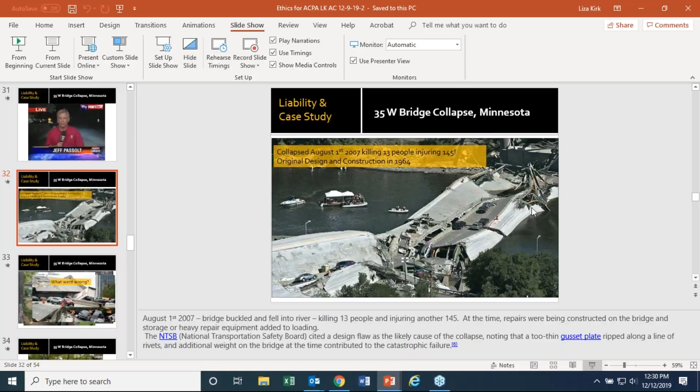Otherwise, I think you'll have to unmute again. It takes just a minute to unmute. Yep, we can hear you. All right, were y'all able to see the entire video? Yes, I did see it. Okay, because it blipped on my computer, so I wanted to make sure.

So we've learned a lot about this I-35W bridge collapse in Minnesota, which happened in early August. There was a lot of devastation because there were a lot of people's lives that were harmed. Look at the different vehicles existing on this bridge. Several people were missing for several days. So this was a huge outcry from the public about a disaster that obviously has some engineers related and involved.

So in further inspection, they went back to the original bridge design and determined that this collapse occurred on August 1st. They did determine that it killed 13 people and injured 145, which is significant. The original design and construction was performed in 1964. This happened in 2007, many years later, and the original design engineers may or may not still be around. But they wanted to know what caused this.

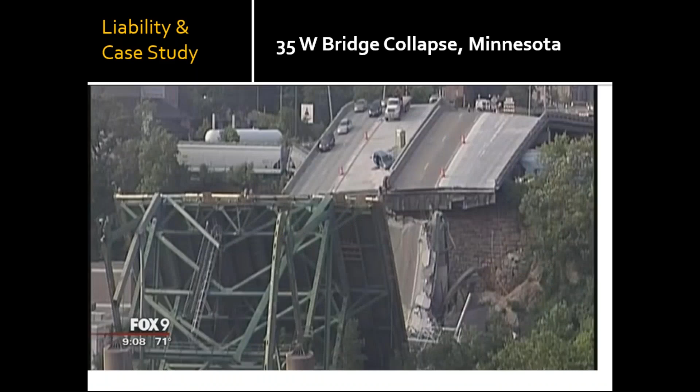Why did this happen? There were lots of different images that we saw. I remember hearing about it. It incredibly impacted the engineering community as a whole, and it brought into question our nation's infrastructure. It really supported a lot of what's going on with the ASCE report card, where we're talking about how our infrastructure is failing across the country, in all aspects. But this really called into question the bridges.

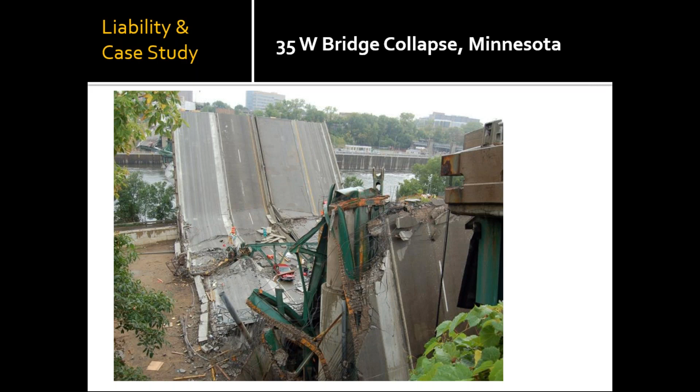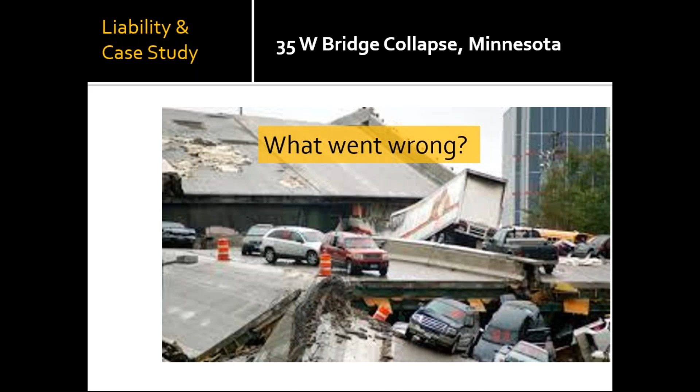Here are some different viewpoints of the bridge as it collapsed. Again, you see those vehicles stuck or crushed underneath the bridge as it collapsed. So everybody wanted to know what went wrong.

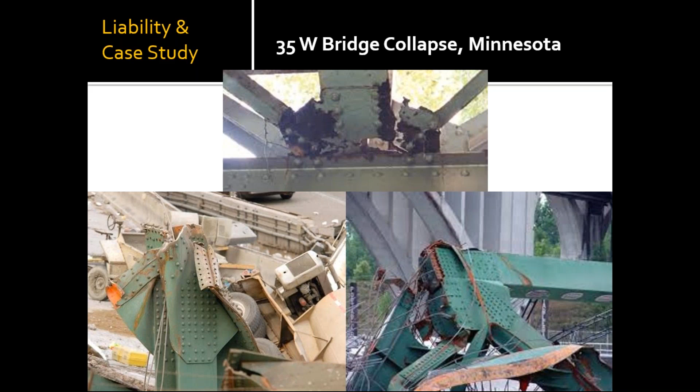They hired forensic investigators to come out and determine what the cause was, and they evaluated the different pieces integral to this particular bridge. They did determine that the gusset plates were too thin and undersized to be capable of supporting the loads. Here you see some of the deterioration and damage at the gusset plates as they failed.

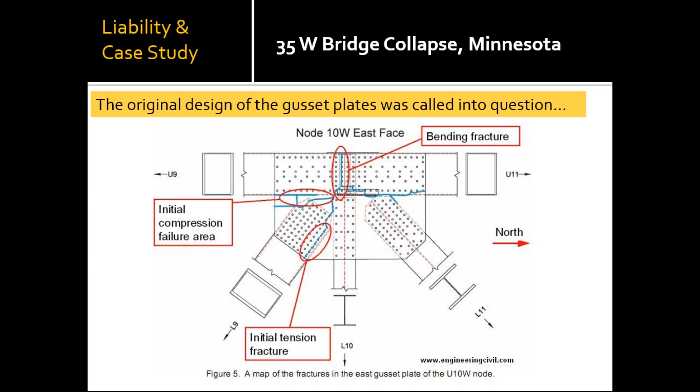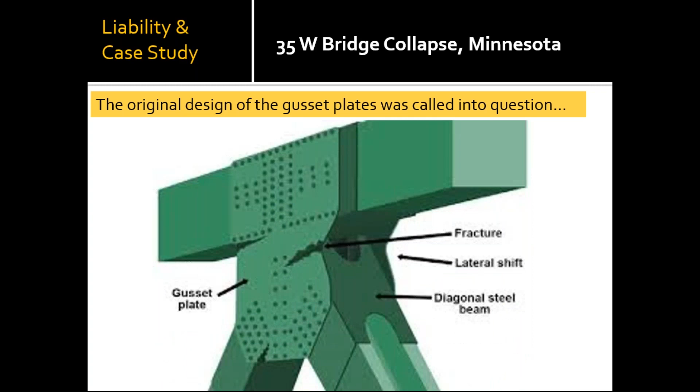So when they called the gusset plate into question, they were redoing a lot of the design calculations and figuring out where the fractures and flaws were in the design and how they could have possibly been prevented. Here we have a detailed drawing showing where some of the different fracture areas were that ultimately caused the failure of this particular bridge. Here's another 3D rendering showing that same fracture and how it just starts to shear and tear and pull everything apart.

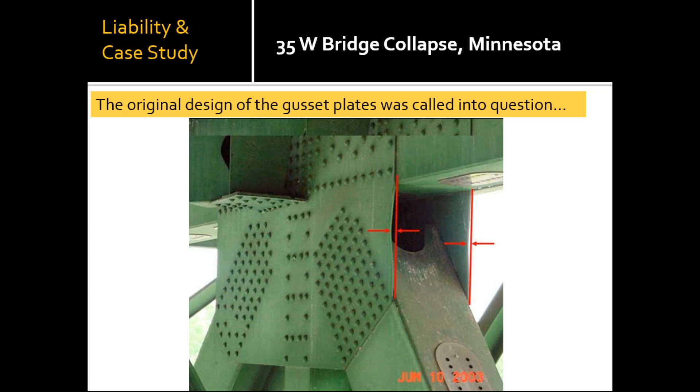And when they started to notice this, they hired URS as a company to evaluate and perform a structural analysis and failure analysis on the different parts. They were joining the DOT as they were going out to do these inspections.

So we went back to the original design, and they were the ones who put together the original gusset plates, back in 1964. Jacobs is the engineer now; they had acquired the company that was the engineer in 1964 that did the original designs. Then, as mentioned, in 2003 URS was hired to do a fatigue analysis on all of the structures. As they were partnered with the DOT doing the inspections, one thing URS determined is they did not need to perform an analysis on the gusset plates, because they thought the original designs were capable and sufficient at the time.

So URS did not actually perform fatigue analysis on those particular gusset plates that ended up failing in the end. Another factor is that there was a maintenance contract on that bridge at the time, and during construction of the maintenance, they were leaving heavy equipment on the deck, adding a loading factor that was not taken into consideration. All of these aspects led to the failure of this bridge.

First of all, it's an older design. They were designing for lighter loadings of the structure initially. When they were doing the fatigue analysis, the company performing it determined that they would not analyze the gusset plates, relying on the original design and also the additional weight provided by the maintenance contractor. So this whole case went to the court system and was being tried.

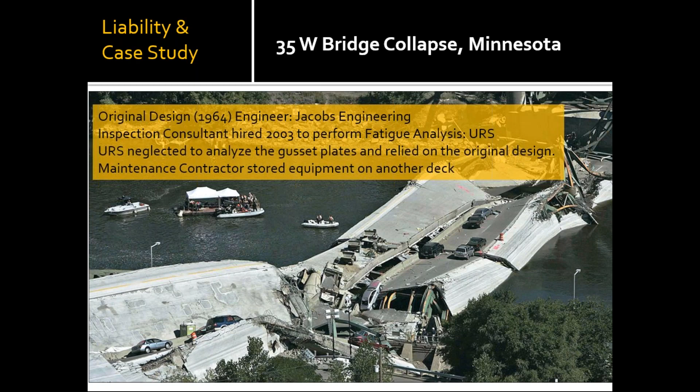They hired forensic analysis to determine all the different causes of failure. And that leads us to the question for you today: who would you find financially responsible for this failure as the engineer that you are? Would it be the design engineer, the original construction contractor in 1964, the fatigue analysis engineer, or the repair contractor doing the construction on the bridge at the time?

And I will hand this back over to Kim to conduct the poll.

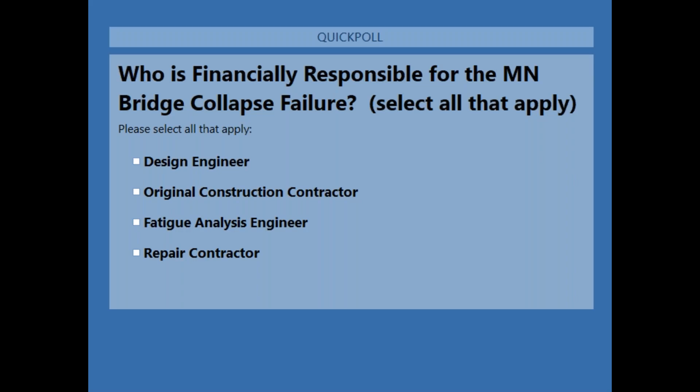Okay, the answers have slowed down. I'm going to close that and share those results with you, Liza. So 53% of the group said the design engineer, 12% said the original construction contractor, 82% said the fatigue analysis engineer, and 41% said the repair contractor.

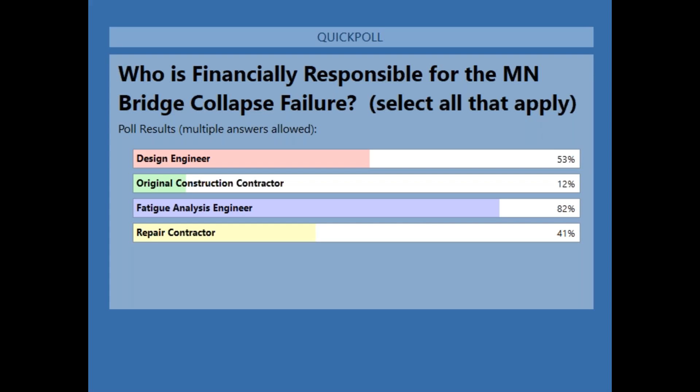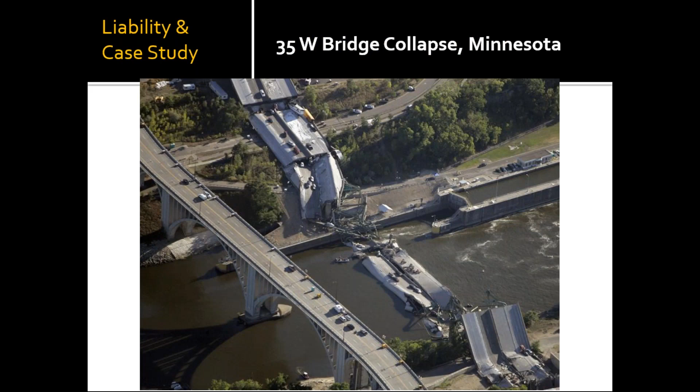Well, that's actually a very interesting analysis, and that pretty much comes into play with what the actual courts determined. This is another picture of that horrible tragedy, and the final outcome determined after several lawsuits: Jacobs ended up paying almost $9 million in the settlement, but they did not admit to any wrongdoing because they were not the original engineer.

Even though they had acquired that company, they did not feel that they as a company did anything wrong. However, they wanted to expedite the settlement process, so they agreed to pay $8.9 million. URS paid $52.4 million to resolve the issue as well, with no admission of liability or fault. So that is what the final outcome was to be.

The contractor performing the maintenance also paid a settlement, a smaller amount. I don't remember the exact numbers, but it was considerably less than both Jacobs and URS. There was no fault found with the original contractor because it went back to the original design not being sufficient.

And so where this comes into play for us as engineers moving forward: when the original design engineer was designing, they were not necessarily performing their engineering duties to consider the public safety and welfare, as Amy was talking about throughout her portion of the presentation.

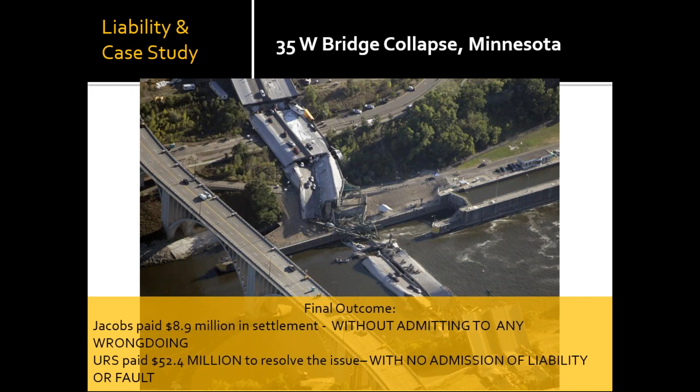The project began construction in July 2008, and they determined that they wanted to use a flexible pipe material. They were using a significant amount of piping between all of these different fish hatchery beds, because each bed needs to be drained of water and filled with water at different times as they are raising different populations of different fish.

So they had 11,000 linear feet of HDPE pipe ranging in size from 30 inches up to 60 inches. That's kind of where the project started. It's a significant project for the Texas Parks and Wildlife. It was going to bring lots of fish populations that they've not had available to the different parks all over Texas.

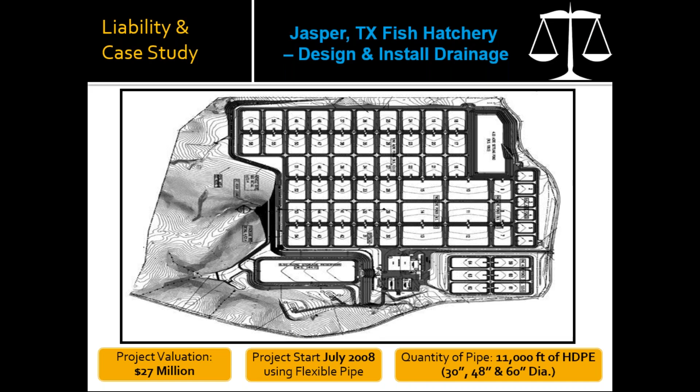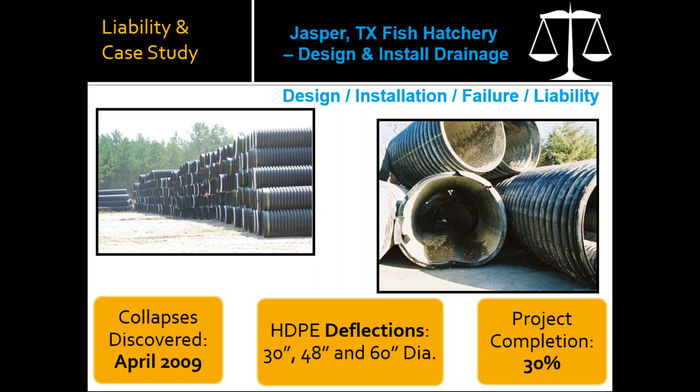As they were going along in their construction, in April of 2009, they determined that several of the pipes had collapsed. There were deflections in all of the different pipe sizes of HDPE, anywhere from 30 inches up to 60 inches. At that point, the project was only 30% complete.

So when this collapse happened, they determined that they would have to hire a forensic investigator to come out and evaluate all of the property, all of the product that was being installed, and determine what the true problem was with this project. The outcome of that report was determined to be excessive deflection.

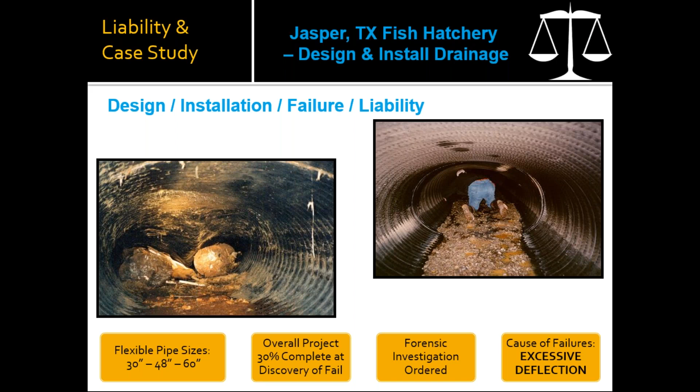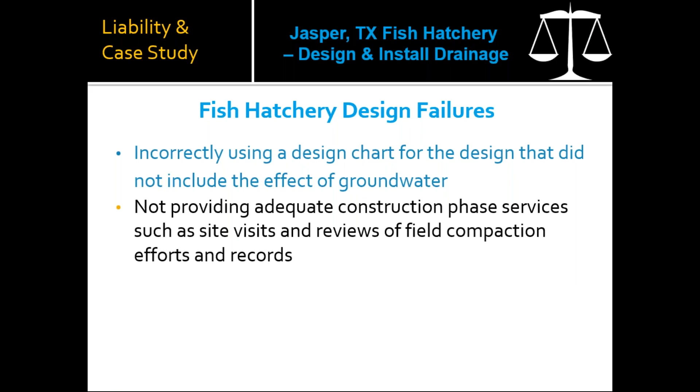So here is a little bit more detail about where the failures happened within the fish hatchery project. The first one was in the design phase. They determined that the engineer incorrectly used the design chart provided by the manufacturer and did not take into consideration the effect of groundwater. They also did not provide adequate construction phase services such as site visits, reviews of compaction tests, and records. They also did not take advantage of the available geotechnical reports and didn't take into proper consideration the in situ soils being used in consideration for proper pipe design. Finally, they specified the improper backfill and compaction materials for this particular pipe installation and project. So that's what the analysis determined for the design failures.

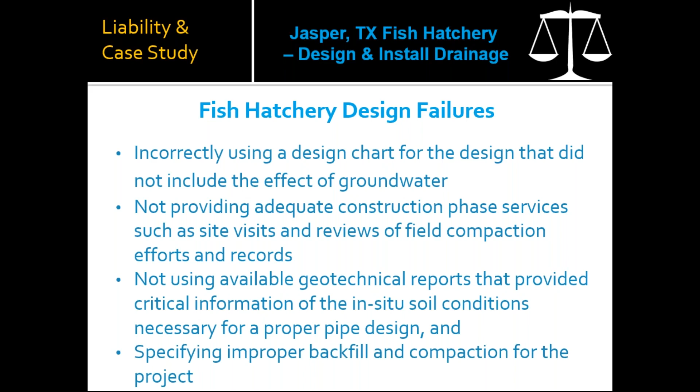Now let's move on to the installation failures. During the installation phase, there was not sufficient compaction. They didn't utilize the trench box properly, as it was too narrow. They could not get adequate compaction equipment on either side of the pipe within that trench, so they were not able to support the pipe as it should be described, and they were not able to provide sufficient compaction.

As they were continuing their construction, they were dragging the trench box along the trench, thus disturbing any compaction that they had achieved. Because as you drag a solid surface through the soil, it's going to leave a gap and an opening at the very edge. So the ideal trench safety would be to lift your trench box, move it to the next location, and install it, not drag it through the trench.

They also did not de-water underneath the pipe in the trench, and they didn't use the correct RFI, request for information process, to resolve any discrepancies between the soils and the compaction that they were achieving. So these were some of the different installation failures that were noted in the forensic report.

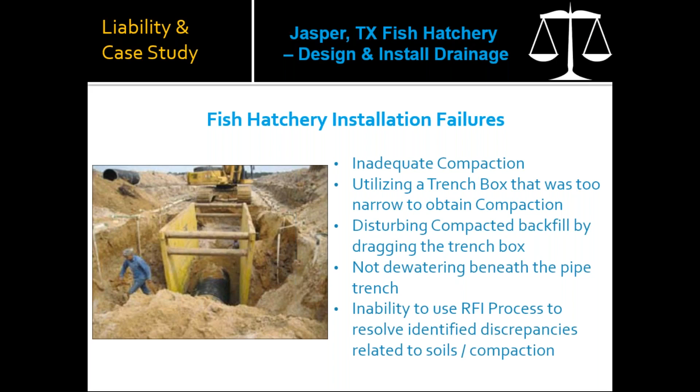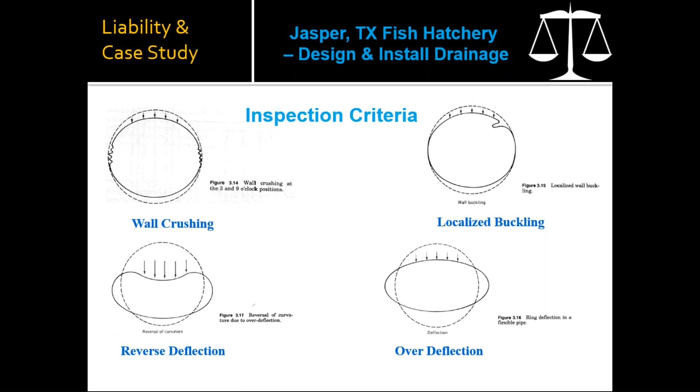During the inspection criteria, here are some options that the inspectors could have been looking for with flexible pipe materials. They have wall crushing, reverse deflection, localized buckling, and over deflection. In the real world, instead of just on pen and paper, these are some images of what those types of inspection could be looking for.

So if you have wall crushing where you've got the crinkling of the pipe, if you have the reverse deflection where it folds in on itself, or if you have a localized object that has pushed its way into a portion of the pipe, or if you have over deflection or ovaling of the pipe - these are different inspection criteria that they could have used on this project that was utilizing flexible pipe.

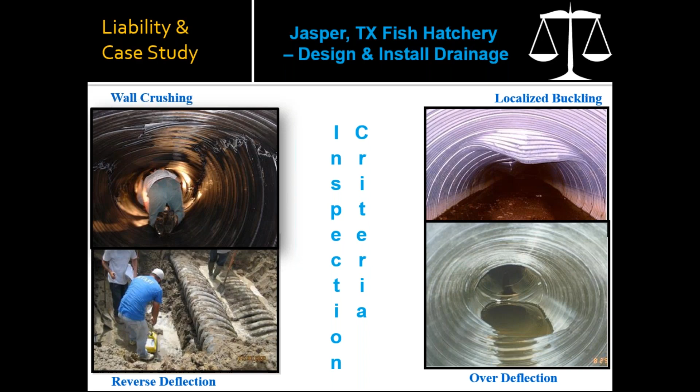Back to our Jasper Fish Hatchery. We had an article written up in Outdoor News, and they were still trying to determine who was at fault. Was it the engineer? Was it the contractor? Who was going to be at fault? In the interview, the Texas Parks and Wildlife Director stated that both the construction company that installed the pipe and the engineering company that designed the project are saying they did everything right. But it is real obvious something went bad wrong here. And unfortunately, that is the truth. Something did go very wrong. And so we now need to determine who is to blame.

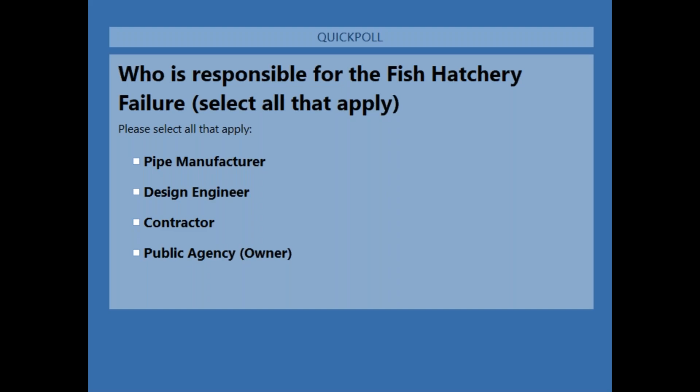So, 21% said the pipe manufacturer, 91% said the design engineer, 89% said the contractor, and 17% said the public agency or owner.

That's very interesting. I actually enjoy this particular case study because it's always interesting to see, as engineers, how we would assign who is liable and who is responsible for this. And quite often, it's a very mixed bag. So it's interesting to see that we've got majority for both the design engineer as well as the contractor. Some are even blaming the owner, and then there's another small amount that's blaming the manufacturer.

So in the real court case, this is what the outcome was. When you assign liability, they determined that there was a $3.3 million cost for this particular failure. The total project was $27 million. So to move forward, it became a $3.3 million lawsuit, and from that, the design engineer was actually held almost entirely accountable. They paid $3.18 million to the owner, and an additional $213,000 to the contractor. So all of this was paid by the design engineer. The contractor didn't pay anything, the manufacturer didn't pay anything, and the owner, all three of those entities were not determined to be at fault in this particular failure. It went back to the design engineer.

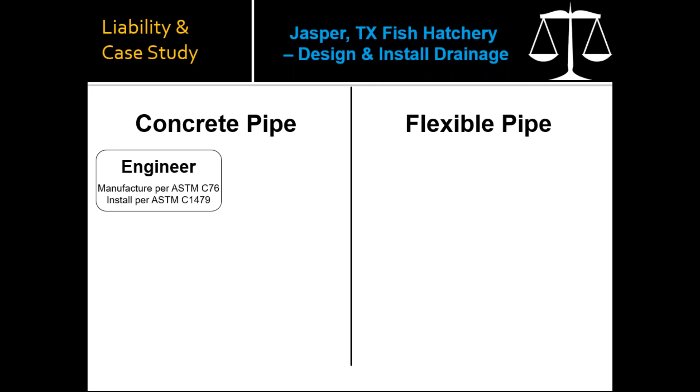Now, to do a comparison for designing between concrete pipe and flexible pipe: when an engineer specifies concrete pipe, they say that it must be manufactured according to ASTM C76 and installed per ASTM C1479. At which point the project bids, the manufacturer gets a hold of the bid tab and takes into consideration, okay, we need to build pipe according to C76. Got it, we have our design parameters, we know what we need to do. The contractor or installer says, okay, we're going to install everything according to ASTM C1479. Got it, we've got our guidelines, we know what to do.

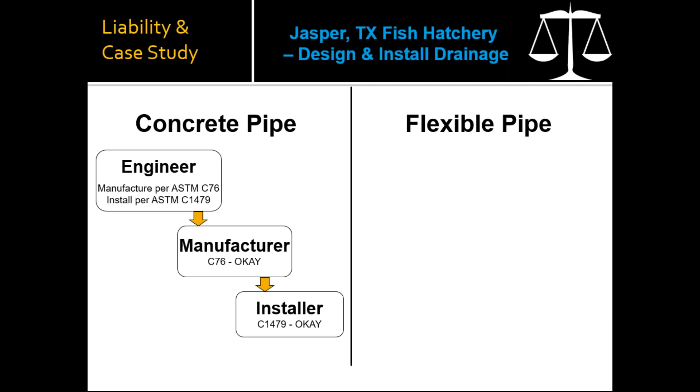In the case of flexible pipe, the engineer will put on their design drawings 'as per the manufacturer's recommendations.' All good. The manufacturer says to be installed per ASTM D2321. Then you get to ASTM D2321, and this standard states that the engineer is responsible for numerous aspects of the design and installation for this particular pipe material to be successful.

And it's referred to 29 separate times. The responsibility ends up back on the engineer. And so for this particular fish hatchery case, where the engineer was found entirely at fault, this is the reason why.

They go back to the standards and say, how is this supposed to be installed? Did the engineer follow all the different guidelines and requirements put into the ASTM standards, the city specifications, the county specifications? Do all of them match up who is responsible for what portions? In the case of the fish hatcheries, the engineer did not succeed in following all of the different guidelines as set up through the ASTM standards, and therefore was found at fault, paying the full amount.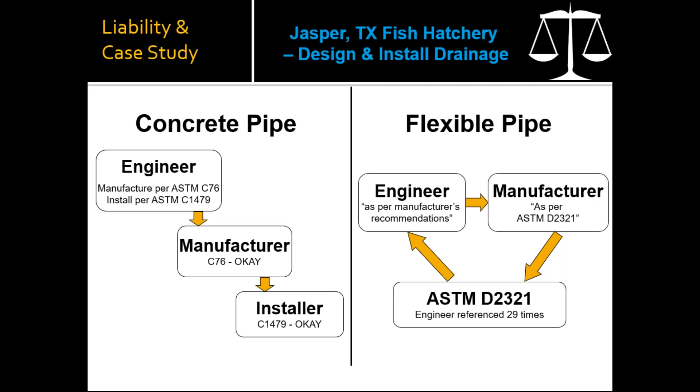In this case, there were no lives lost. The public's health, safety, and welfare was not held in disregard. It was just an oversight on the engineer's part, and it needs to be something we take into consideration with any material we're using, whether it's the gusset plates, doing the inspection, whatever you name it. All aspects of this are what engineers need to take into consideration when they are performing their honest and ethical work.

If you'd like to know more about this particular project and situation, there is a publication offered through the American Concrete Pipe Association. They have a public works article that was written, and we have that available for you through our website.